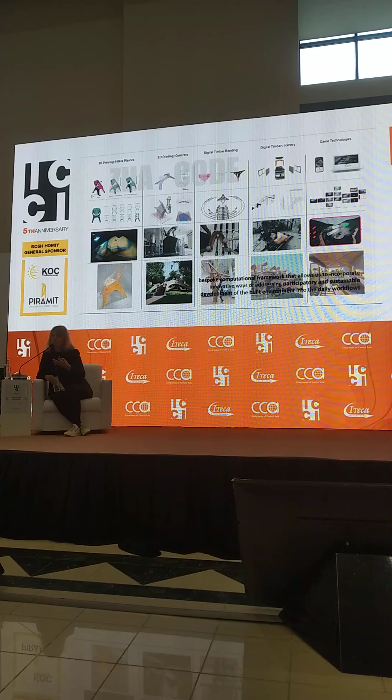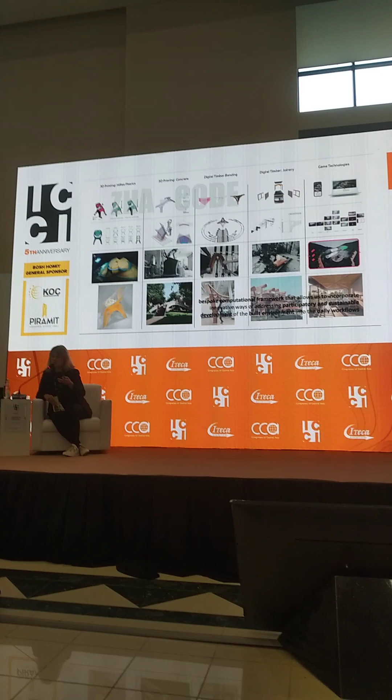We create these computational tools, advanced computational tools, such as scripts, and the software range also developed with us. We have to create tools that would be beneficial for our projects to make them realistic. So it works both ways - the industry and technology follows the demands of the architects.

There are four main areas of research: manufacturing technologies and responsible design, modular construction, as well as gaming technologies. I will stop on this a little bit later in the session.

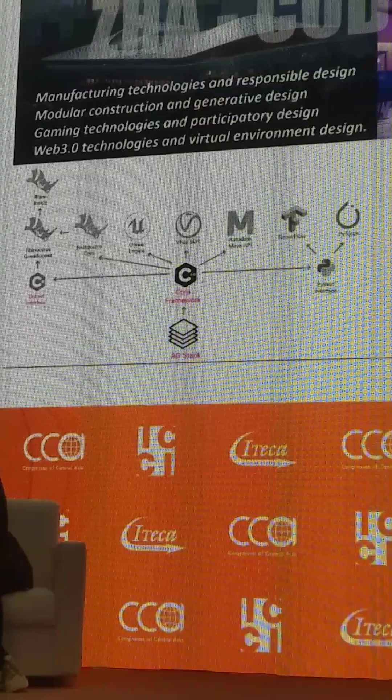We have Web3.0 technologies: the virtual environmental design, but the virtual and physical world overlap, and virtual reality becomes a part of our everyday life.

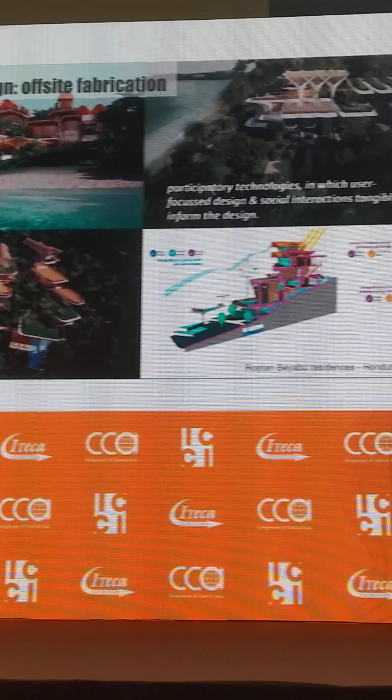One of the projects where this research basis found realization is the modular design for this Honduras housing. This project is interesting because it engages the community. We created a set of modules, like a toolkit, a platform which the residents can use to create their own house.

With this project, the aim is to use locally available material with very short travel distance. This modularized construction can be fast and efficient with off-site fabrication to minimize also the impact on the environment. It's located in the rainforest, and one of the aims was not to damage the nature and to create this housing fully integrated in the environment.

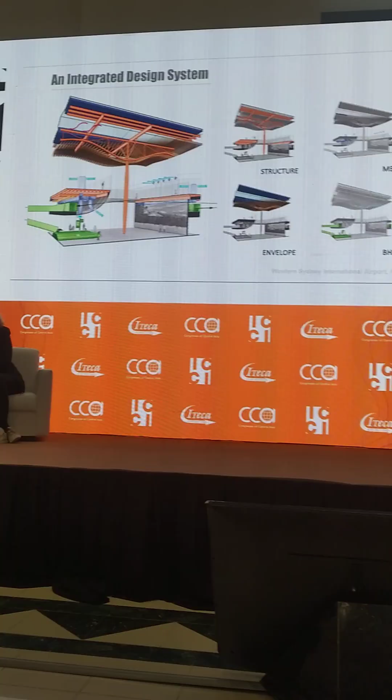Another example is one of our recent projects in development with Western Sydney International Airport. Here, I think it's easier to understand all these tools and methods that we are using. And of course, it's not only us - each project involves many consultants and engineers, facade consultants, and collaborators from all different disciplines.

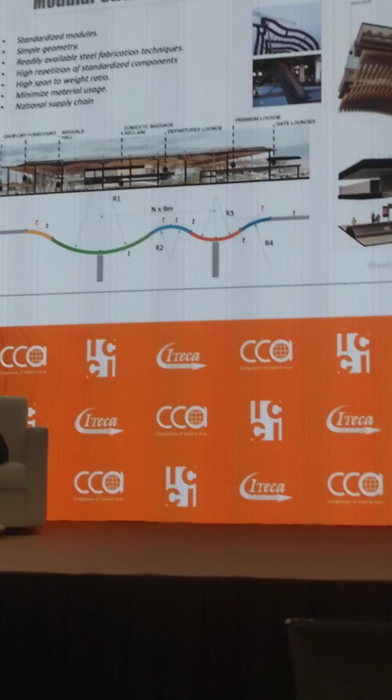But eventually, this project, for example, can be broken down into a series of components that are fully integrated into one system. So it uses standardized modules, minimizes material usage, and still creates a range of design solutions that can be then proliferated, multiplied through the whole project.

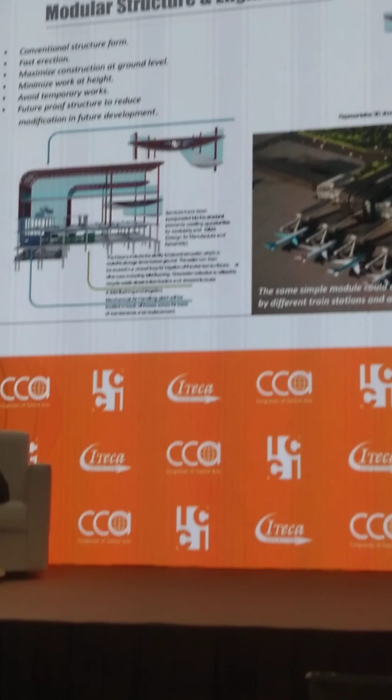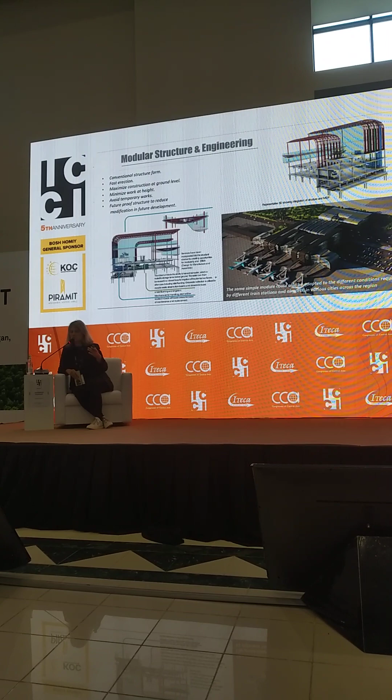Another study, this is one of the studies for modular airports - that could be train stations or even smaller units. We even use this approach for modular schools, for example, that can be deployed in areas that are being developed. Before the main construction comes in, the modular construction can be done, and can be reused, maybe even in other places.

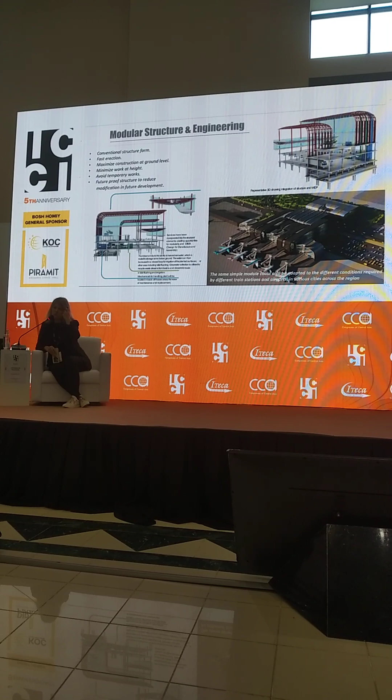So here again, the use of modular components - fast construction and minimal impact to the environment.

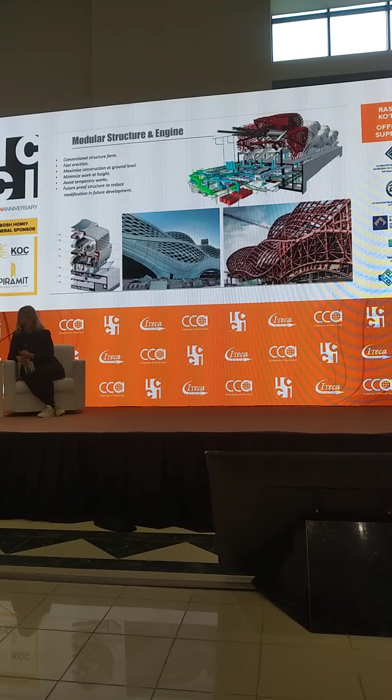One of our iconic projects, following from what I described before, the King Abdullah Financial District metro station, is one of the largest transit metro stations, certainly in Saudi Arabia. While this project is complex, it is buildable and it is rationalized through the use of repeated panelization, and it's a set of modules that is then applied to the structure.

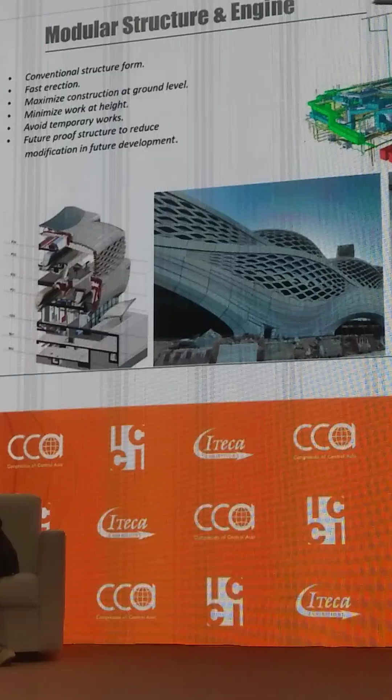Here we touched a little bit on the use of BIM, and many of our projects - so all of our projects - are done in BIM.

So all of our projects follow the path from the design softwares to Revit. Revit is now the main tool, and we use it at early stages. Software development over the last 10 years, as well as our internal tools, allow us to translate our geometries directly into Revit.

You can see in this model the ideal scenario of the BIM model, where structure, facade, and MEP services are integrated with the design. This model is used and developed through the design stages, and eventually to check and correct things in real time on site. It can also be used throughout the life cycle of the project to monitor various parameters.

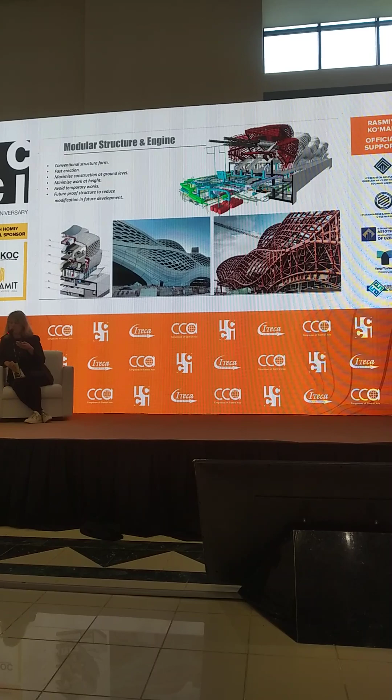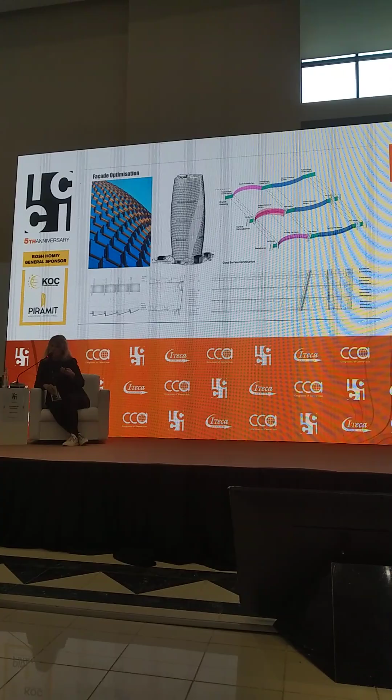Another project I prepared here is one of the recently completed office buildings in China, Soho, which features the tallest atrium in the world. Here you can see the tower is split in half. This is because there is a train tunnel passing underneath, so the site is very limited, and the core had to be split in half. So we create two towers interconnected through this atrium.

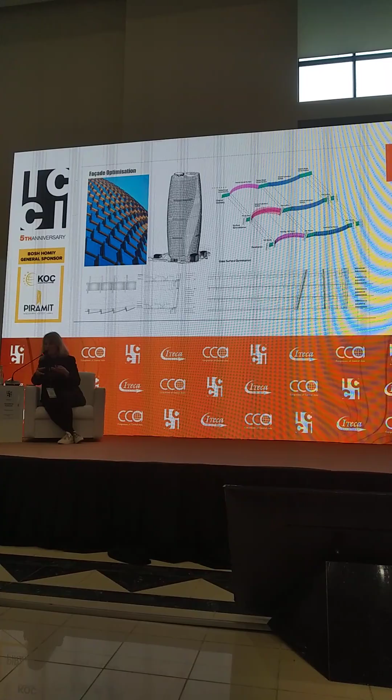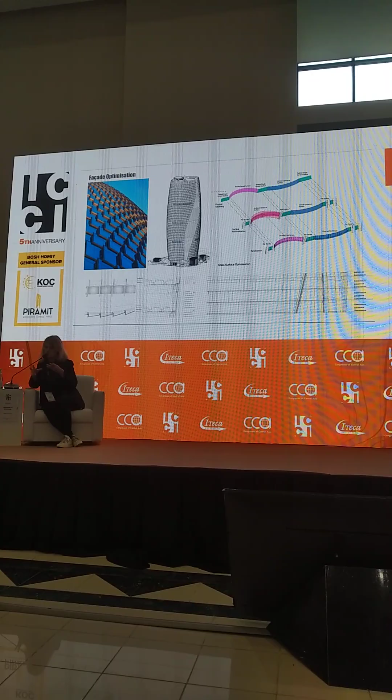Here's a little bit of the design process. The building looks cylindrical and completely round, but through rationalization and development, we go from the original geometry, through surface rationalization and panelization, to arrive at completely straight panels of the facade, which you can see on the left of the image.

As a result, you get the overall design carried through, but rationalized and built using more conventional technologies, also reducing the cost of construction, so that there are no curved or minimized curved, double-curved panels in this project.

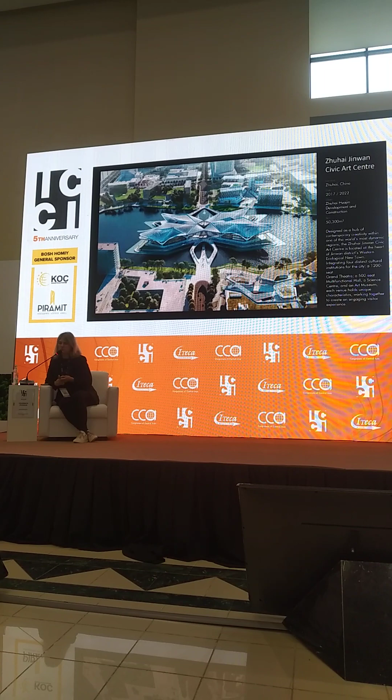Another project included here, I tried to show some more recent work and talk a little about how we have done it. The Zhuhai Jinwan Civic Art Centre includes 4 wings and is part of the new aviation city master plan.

In terms of sustainability, we try to integrate as much as possible the systems. This lake, for example, is an artificial lake, and the whole master plan is part of a completely new development, as often happens and still happens in China.

In our project, we try to develop and realize systems and ideas that would enhance this new environment, that would create spaces for people to use and enjoy, so these buildings don't sit abandoned. This becomes again an attraction to the local community and people from further away.

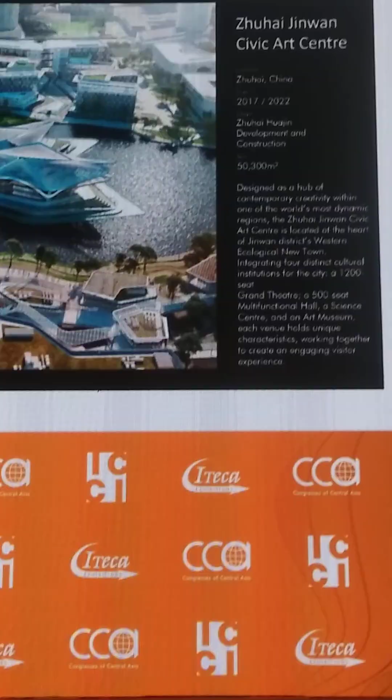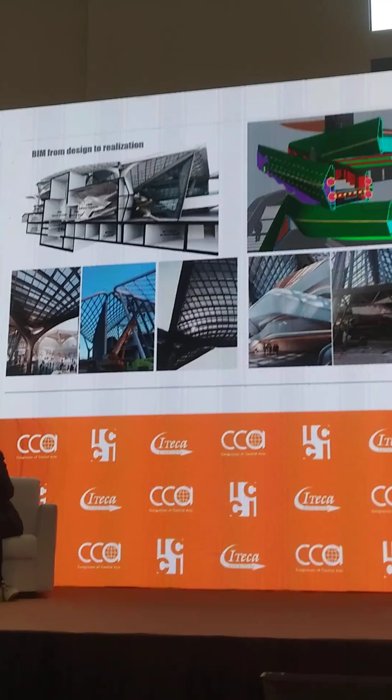Here in the 4 wings, it's a theater, black box theater, museum, and science centre. And here again, I selected images from the design model and visualization through construction and completed design.

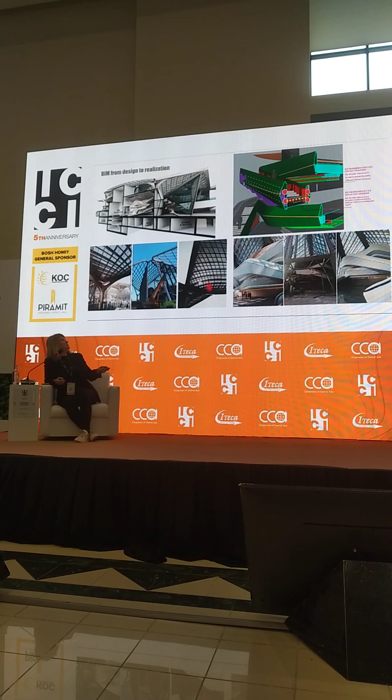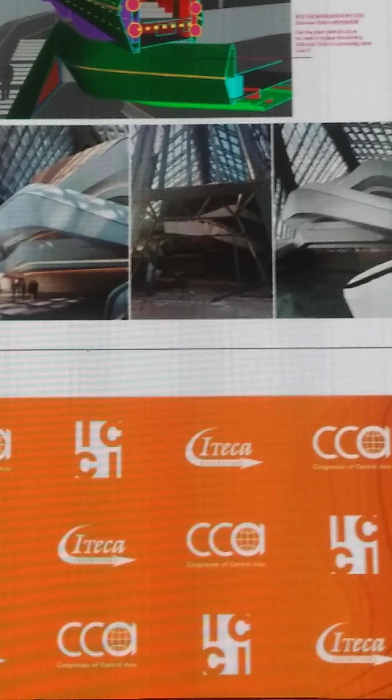This is the visualization at the beginning, the construction process, and the completed form, which again, the form may be complex, but it is rationalized and constructed in a way that it keeps the original qualities of the design.

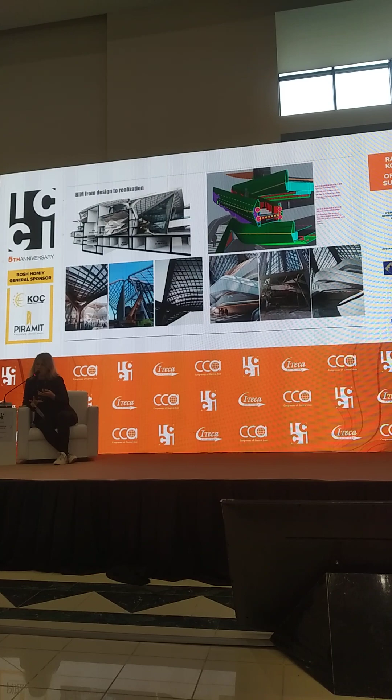A big part of it is the use of BIM technologies, and you can see here the example of the design model and the structure model, so we can, in real time, adjust the geometry and integrate all the necessary systems.

This is one of the construction images. Now this project is completed, opened a few months ago. So then coming to the next part.